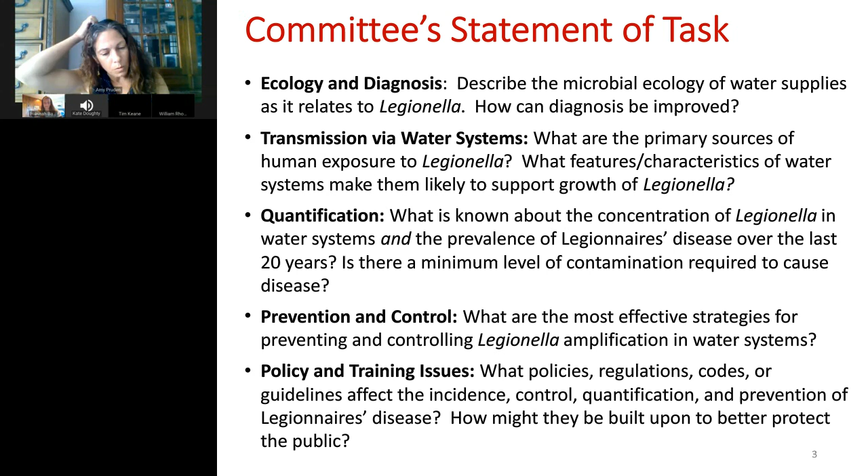Note that this was a consensus report derived from a committee of experts on various aspects of Legionella. Over a 2-year period, we had several face-to-face meetings, including public forums and expert presentations, to work out the details of the report, gain input, feedback, and ultimately consensus. Here is an overview of our statement of task and what is covered in the report. And the report basically follows this outline: ecology and diagnosis, transmission via water systems, quantification, prevention and control, and policy and training issues. So I'm going to go through and highlight each of these sections and mainly focus on the recommendations that emerged from the report.

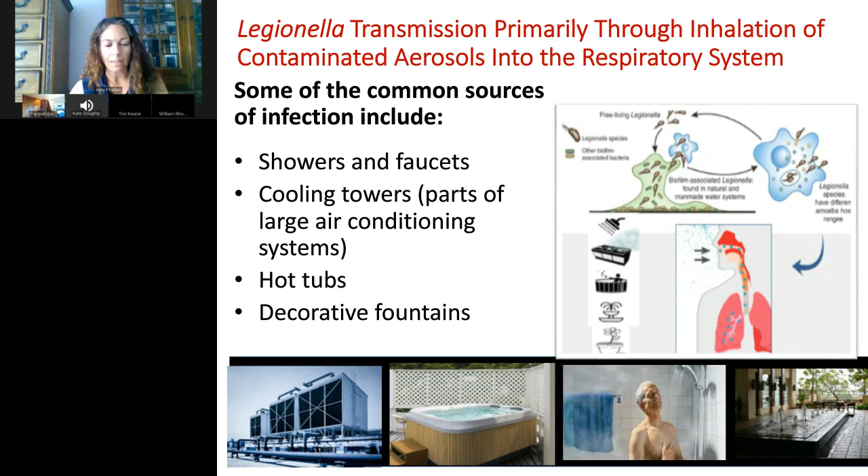So firstly, just so we know what Legionnaires' disease is, it is a severe form of pneumonia with a high death rate. It's caused by inhaling tiny droplets of water called aerosols that contain the bacteria belonging to the genus Legionella. Where do these aerosols come from? Well, obviously, since I'm here today, engineered water systems, and that includes showers and faucets, also cooling towers, hot tubs, and decorative fountains.

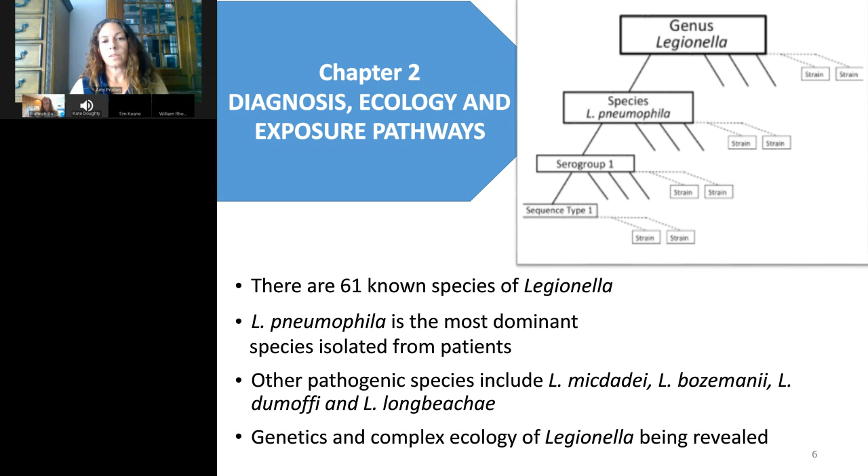So chapter 2 focuses on the microbial ecology of Legionella with the aim of understanding why it is prone to growth in water systems. And this sets a backdrop with respect to what we might do about it. Notably, there are many different kinds of Legionella, 61 species to be exact, but Legionella pneumophila is the one that is most frequently isolated from patients. From there, you'll hear about different serogroups and sequence types, and this helps to track the source of an outbreak by providing a fingerprint of sorts.

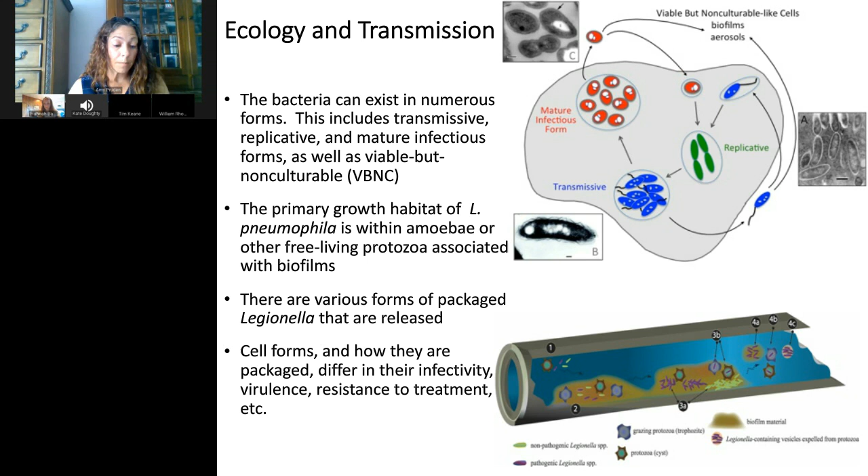But unfortunately for us, Legionella can feel quite at home in the plumbing environment. And in particular, they like to grow in biofilms, and they replicate there within free-living amoebae that slither along and graze on these biofilms. After replication, they're released from the amoebae in an infective and virulent, that's disease-causing, form, and ready to be inhaled when the water is sprayed and aerosolized.

In terms of recommendations, I would generally boil these down into an interest in better understanding the exact conditions that make Legionella of all species and serogroups and serotypes grow in plumbing, and to be released in a form that causes disease.

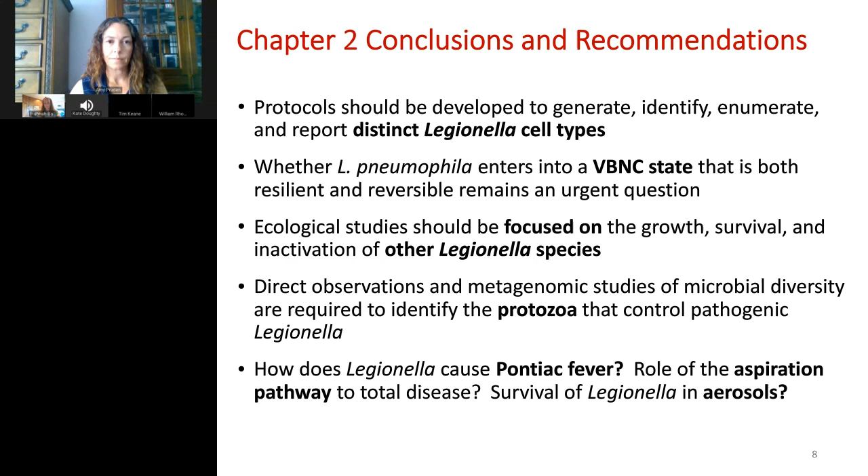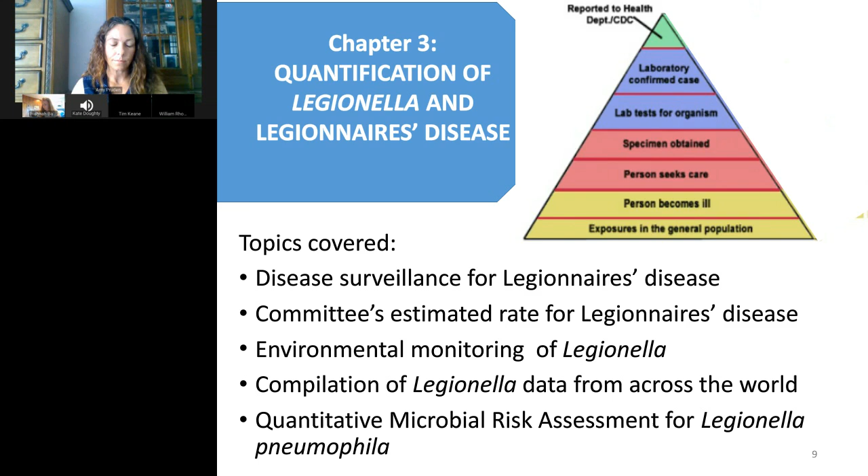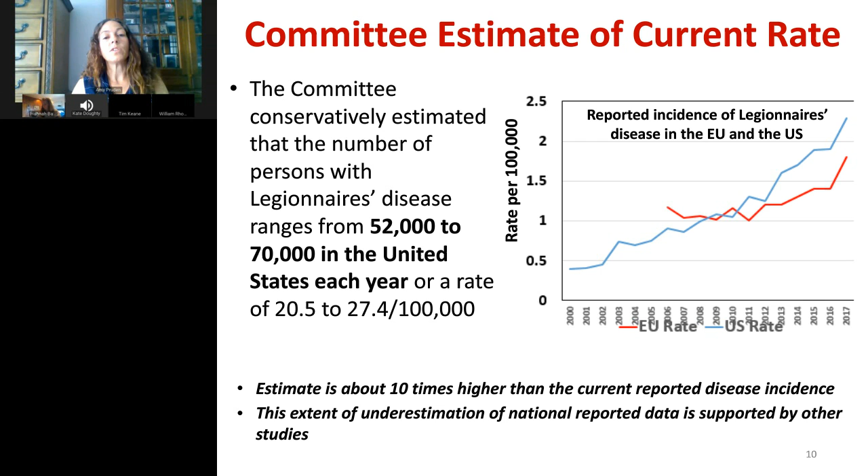A major contribution of the report, in my mind, is an independent analysis of available data, suggesting that even though we know rates of Legionnaires' disease infections are increasing around the world, the numbers are probably about 10 times worse than we thought. Often you hear the number 8 to 18,000 cases per year, but when you factor in the widespread underreporting that's going on, then the likely number is 52 to 70,000 cases per year in the US.

Another major contribution of the report is a step towards a non-zero action level for Legionella colony-forming units. The rationale is that you're going to get Legionella hits here and there when you test pretty much any water source, and that doesn't necessarily mean that there's a risk of outbreak. And I probably don't need to tell you all that a great deal of money can be wasted trying to achieve an unrealistic goal of zero Legionella.

So here we examined reported levels of Legionella in absence of outbreak and when there is a known outbreak to identify a conservative threshold of 50,000 CFU per liter as an action level to warrant remediation. But we recognize that a lower level might be warranted when you have at-risk individuals, but this is a starting place.

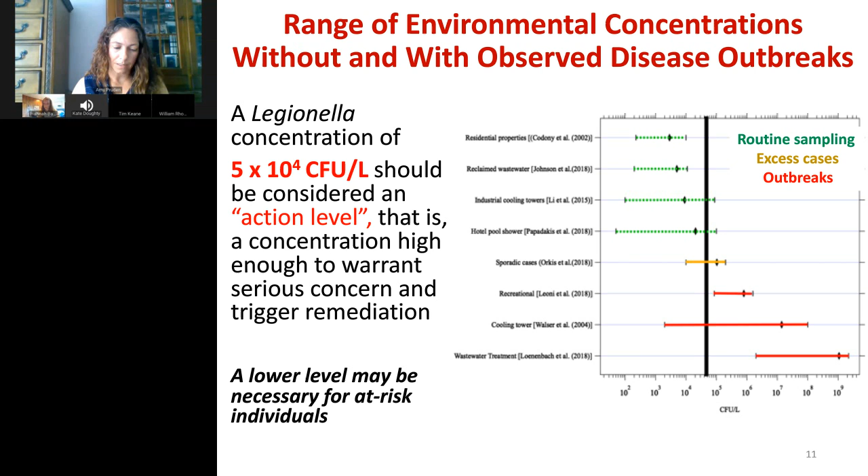These are the specific recommendations from Chapter 3. First is better clinical tools that capture more cases of Legionnaires', not just those caused by serogroup 1, which is what the urine antigen test captures. The second is to get a better handle on sporadic or non-outbreak disease. That was a big highlight motivating the report: we talk about outbreaks, but 95% of Legionella cases are not outbreak associated. And it was suggested that regional centers of excellence could help to support and build up the capacity of state health departments to detect and investigate cases of disease.

We also called out the need for more sensitive and reliable methods for monitoring, and finally, for the incorporation of quantitative microbial risk assessment to inform monitoring and regulations and get more confidence in the estimate for action level.

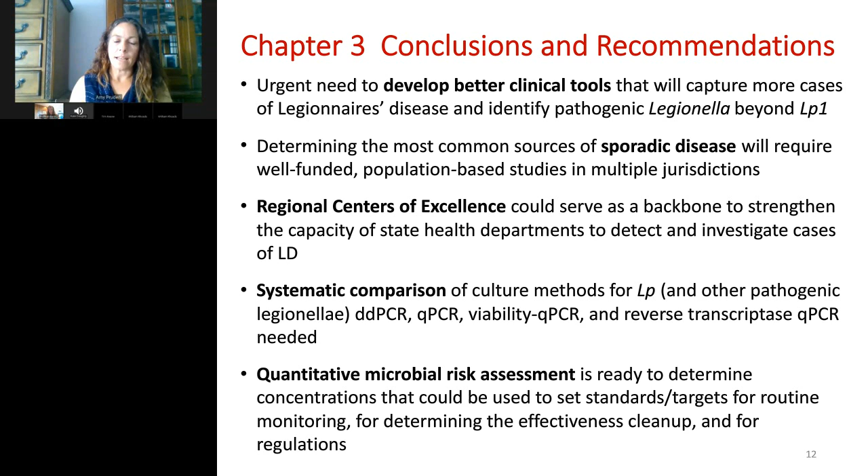Chapter 4 then delves into strategies for the control of Legionella in buildings. The main ones you will find are illustrated in this figure, ranging from elevated temperatures to addition of disinfectant, hydraulic design, and plumbing materials. An important point here is that none of these control strategies act in isolation, that you really need an integrated perspective adapted to the system of interest. For example, hydraulic design is not simply washing the Legionella out of the system, but it's ensuring that disinfectants and hot water are being effectively delivered to kill the Legionella.

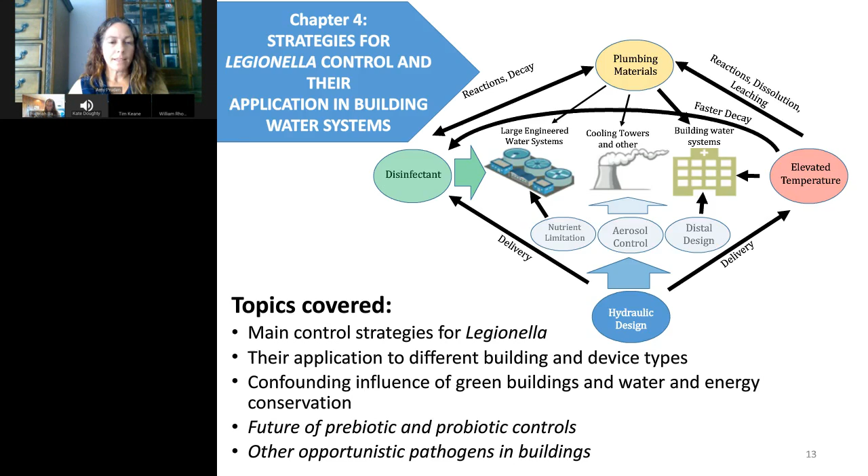And in fact, from the literature review, I'm sure this audience would be interested to know that we found that maintaining elevated temperature throughout the hot water plumbing was the overarching factor in keeping Legionella numbers low and reducing risk of outbreak. And thus our recommendations were that hot water temperatures should be maintained above 60 degrees Celsius and at least 55 degrees Celsius to the distal points.

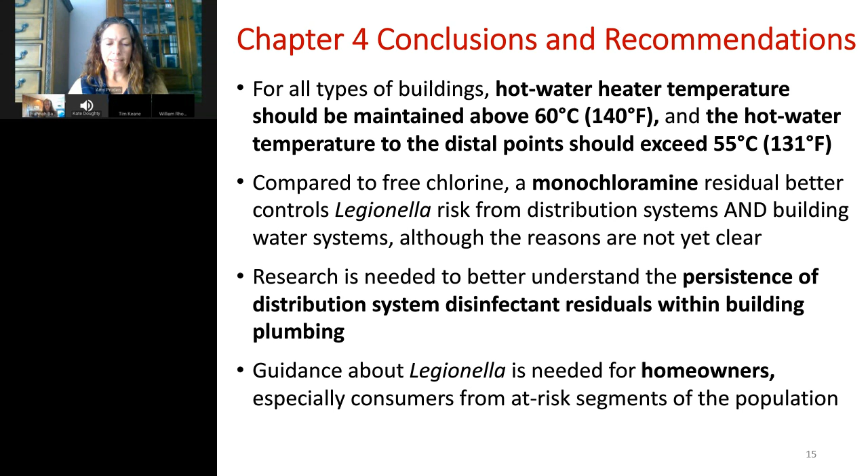We also noted that monochloramine tends to be more effective than free chlorine for Legionella control, but we understand this can be situation specific. We also talked about how much of the guidelines are focused on large institutional buildings, but if most Legionella cases, 95%, are indeed sporadic, then it would be good to have guidance for homeowners as well.

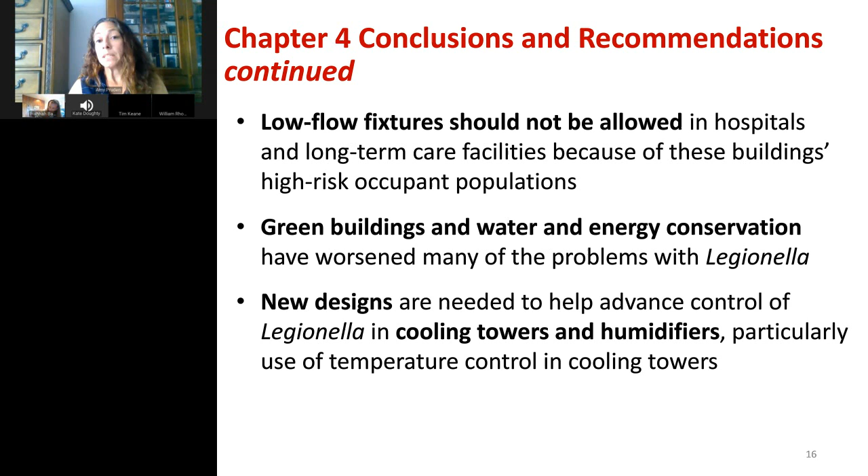Finally, we came out strong against low flow fixtures and green water features in high-risk environments, and also recommended new designs for cooling towers to avoid growth of Legionella and opportunity for people to be exposed to contaminated aerosols.

And finally, I personally found Chapter 5 to be one of the more interesting chapters. It provides a legal framework in the US, what is our legal framework, and also looks at how other countries are addressing the problem. Number one, the Safe Drinking Water Act, unfortunately, does not provide protection from Legionella. All of the focus tends to be at the building management and liability level in the US.

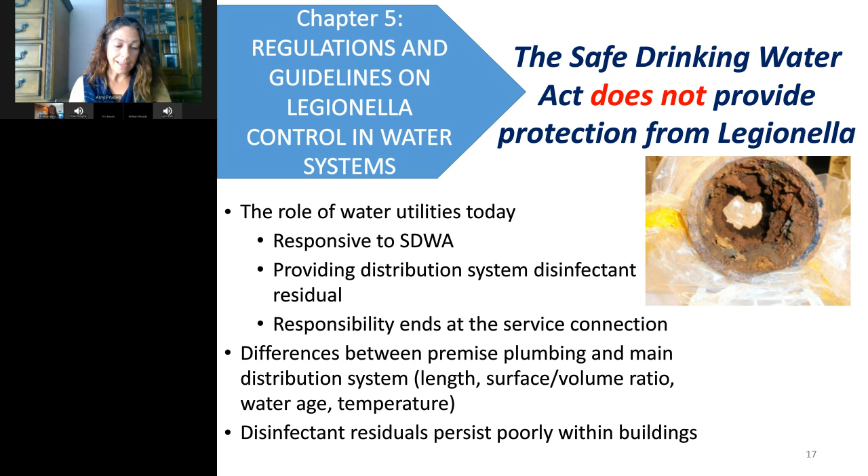Yet, following Flint, Michigan, we are seeing examples wherein municipal water supply is a key factor in triggering Legionnaires' disease outbreak. Yes, building plumbing is more vulnerable than water mains to Legionella growth due to factors like the high pipe surface area, depleted disinfectants, and warm temperatures, but changes in the municipal water supply can trigger growth in building plumbing as well.

And here is a summary of how Legionella is managed in the US. There are 4 examples of regulations covering Legionella. Both healthcare and cooling towers in New York State, which became highly vigilant about Legionella following the 2015 Bronx outbreak. The third is all Veterans Administration hospitals. And the fourth, most recently, actually as of 2017, all hospitals receiving Medicare, Medicaid funding must have a water management plan.

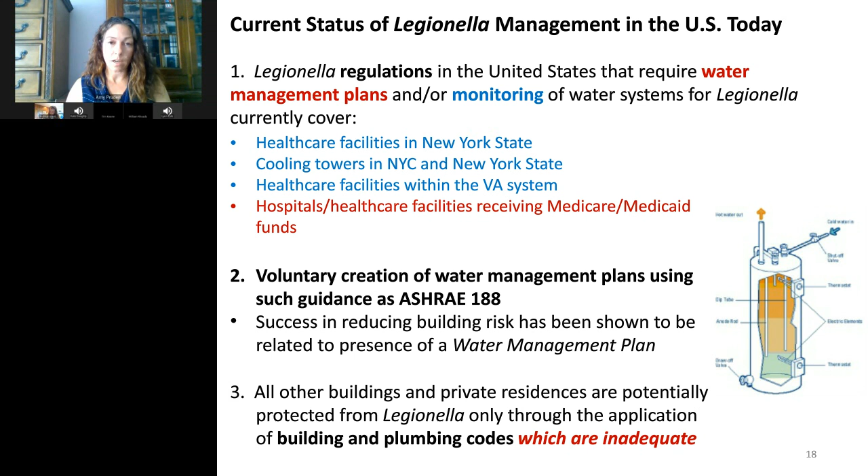Otherwise, Legionella control has been largely voluntary for public buildings, many of which choose to follow ASHRAE 188. And for private residences, we really only have the building and plumbing codes, which are pretty much silent on Legionella.

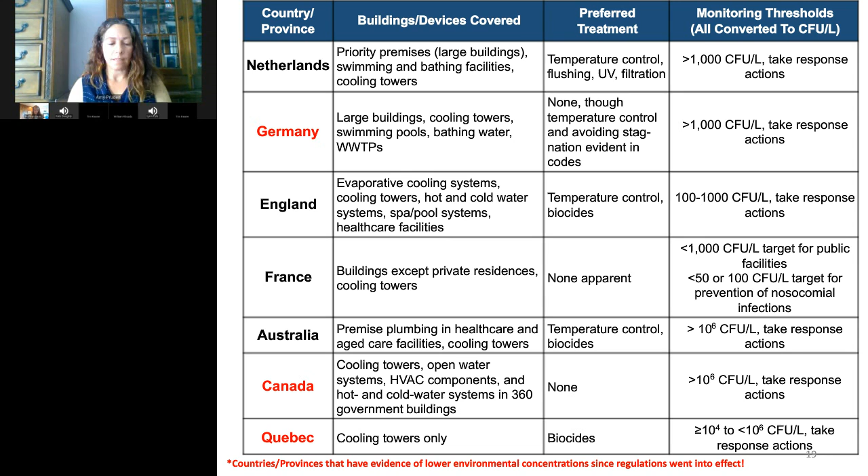Our recommendations, we would like to see required monitoring of Legionella in all hospitals, registering and monitoring of cooling towers, required water management plans in all public buildings, requiring elevated water temperatures, and minimum disinfectant residuals throughout the public water systems.

So that was pretty much a whirlwind tour of the report, and I hope that I've helped capture your interest that Legionella is indeed a very important public health problem, and that you all here at the Hot Water Forum actually stand in a key position to do something about it.

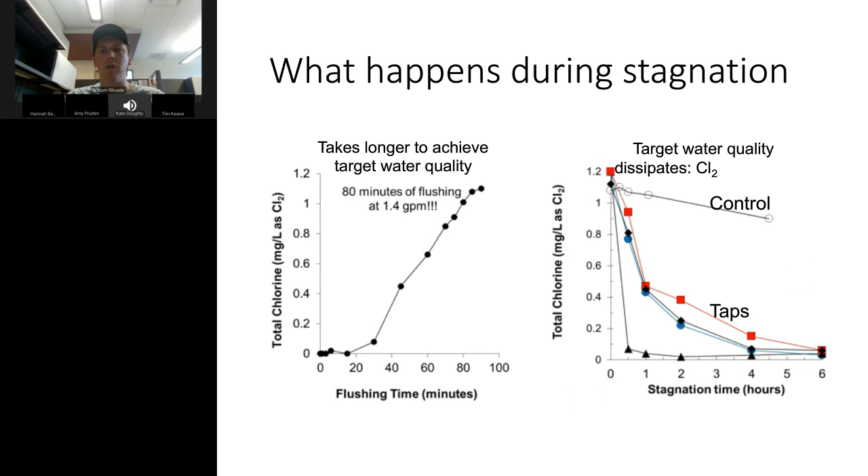The similar dissipation of target water quality also occurs with temperature. So, of course, temperatures will last a little bit longer if your pipes are insulated and things like that. But even if you're flushing your outlets at 60 degrees Celsius, the water temperature at that point of use will dissipate, and for the vast majority of time most outlets are sitting stagnant, unused, and the water can remain at growth temperatures for Legionella and other microorganisms and opportunistic pathogens as well.

The other thing that happens during stagnation is that biofilm and scales can become destabilized, so that when you flush the water, you can release a large amount of either iron or copper or lead if you have those sources in your building plumbing system. Usually what happens is that the first bit of water has higher concentrations than really well flushed water because those scales are being destabilized.

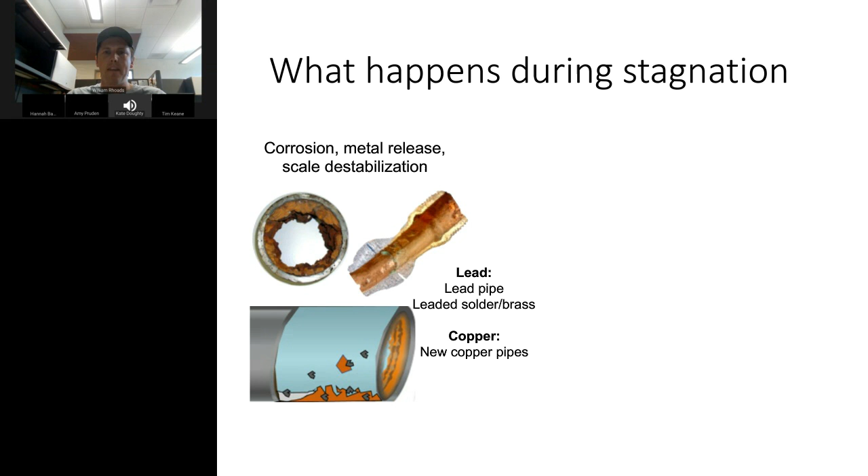And of course, during stagnation, opportunistic pathogens can also grow and be released from biofilm. And during stagnation, biofilms actually become less stable, so the first bit of water that comes out of your tap is the most likely to have the highest level of microorganisms. And Legionella has a specific relationship with host organisms that are amoeba, and they can grow within amoeba to very high concentrations, and they can be protected from chlorine and temperature within the amoeba as well.

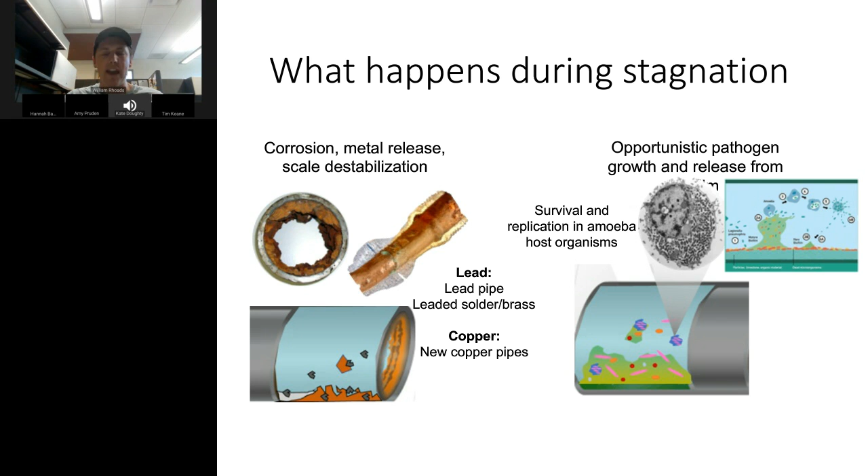So it's easy to imagine that if these amoeba hosts are preventing the exposure of Legionella to the target water quality, like a disinfectant residual or high temperatures, how they could survive within the pipes, even if you're occasionally achieving target water quality. So it's really then about having your water hot enough for long enough and achieving that frequently enough that Legionella growth is not permitted.

And so hot enough is very clearly defined, as Amy outlined. If we generate hot water above 140 degrees Fahrenheit, then Legionella can't grow in the tank. And if we distribute it and recirculate it above 120 degrees Fahrenheit, then it's not going to grow in the main distribution system either. But at the individual taps, when you flush your water and you achieve your hot water temperature at the point of use, it'll be there, but again, it'll dissipate over time. So it's about determining how frequently you have to do this.

And in most cases, or some cases, regular use at the distal outlets will be enough to achieve this. But in some rarely used or infrequently used outlets, it might require people to go in and manually flush the water. But I did want to point out that sometimes you can have unintended consequences from this type of control strategy. And so I wanted to talk about one experiment that I did during my PhD dissertation,

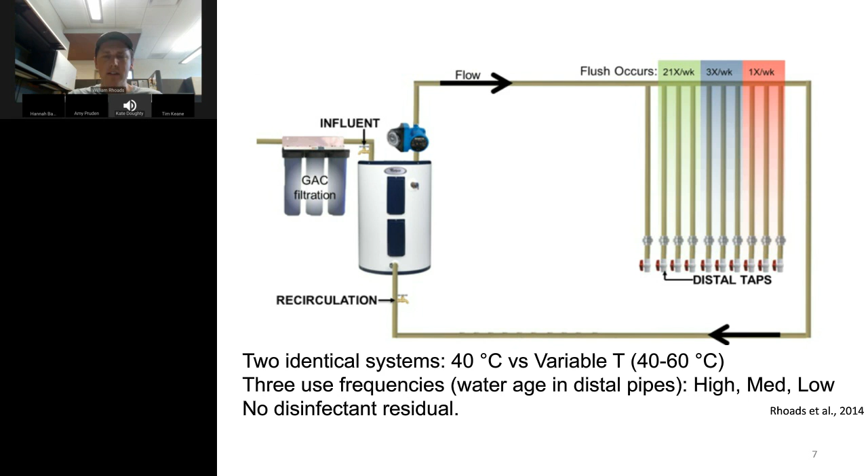where I operated pilot scale hot water systems that had a regular residential water heater with this recirculating loop. And I had two identical systems. One system was 40 degrees Celsius, and the other system started at 40 and was gradually increased to 60 degrees Celsius. And off of the recirculating loop, which was continuously recirculating 24/7, I had simulated distal outlets that were flushed 21, 3, or 1 time per week to simulate high, medium, or low use frequency. And all of this was conducted without a disinfectant residual present to test worst case scenario water coming into the water heater.

And so what we're going to look at is what I call a regrowth factor, and it's on a log scale. So a value of 1 on this graph indicates that there was 10 times more Legionella pneumophila in the distal outlet than in the recirculating line. And a value of 0 indicates that there was no change or no regrowth in the distal outlet compared to the recirculating line.

And I really wanted to highlight just kind of the most critical result here, where when we were operating our water heater at 123 degrees Fahrenheit in the recirculating line, the distal outlets that were flushed just once per week seem to have thermal selection for Legionella growth at those individual distal outlets, as opposed to the medium use and high use taps, which were likely used frequently enough to inhibit the regrowth of Legionella.

But essentially what we think was happening was the 123-degree water was coming into the outlet once per week. It was disinfecting a lot of the microorganisms that were at that distal outlet, but the Legionella were potentially surviving within amoeba hosts. And then after the thermal shock had dissipated during the stagnant conditions, the amoeba and Legionella could then regrow.

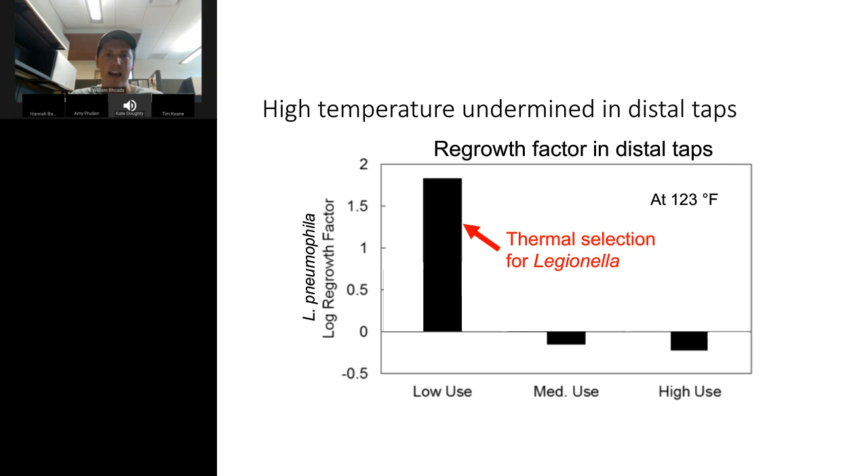So in terms of when you should flush and a little bit of how you should flush, for flushing of water heaters, remedial flushing is really necessary after prolonged stagnation when the water heater tank has been very, very stagnant. And through this practice, you're temporarily decreasing the contaminants, but it's not a long-term solution. And it should be noted that incomplete flushing may actually temporarily increase the level of contaminants as well.

So for instance, if you're using manufacturer recommendations, if you completely drain and clean and refill the tank, if you do this inefficiently, then you're basically going to be disturbing and resuspending some of the debris and sediment that accumulates at the bottom of tanks.

For remediation of Legionella, it's better to just focus on turning over the entire volume of the system by flushing at a drain valve, for instance, at the highest flow rate that you can to turn over the entire volume of the system. And if you're flushing at this drain valve, you can turn off the heater and just flush until the water becomes totally cold, or you can estimate the time needed to flush based on the volume and the flow rate that you're flushing at.

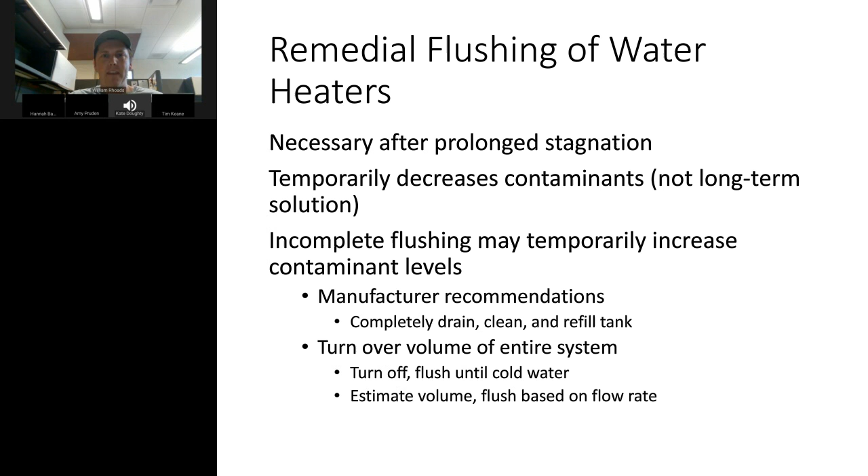In some instances, regular or routine flushing of water heaters may also be necessary if you're not operating the water heater at the recommended temperature settings. If you're operating them too low, then you'd want to flush your water heater regularly enough to try to introduce a disinfectant residual to the water heater as well. So this can be done in many cases through regular use. If you have an appropriately designed system, regular water demand will turn over your water heater and achieve this for you. But it could also be necessary that you actually go through and simulate regular water use.

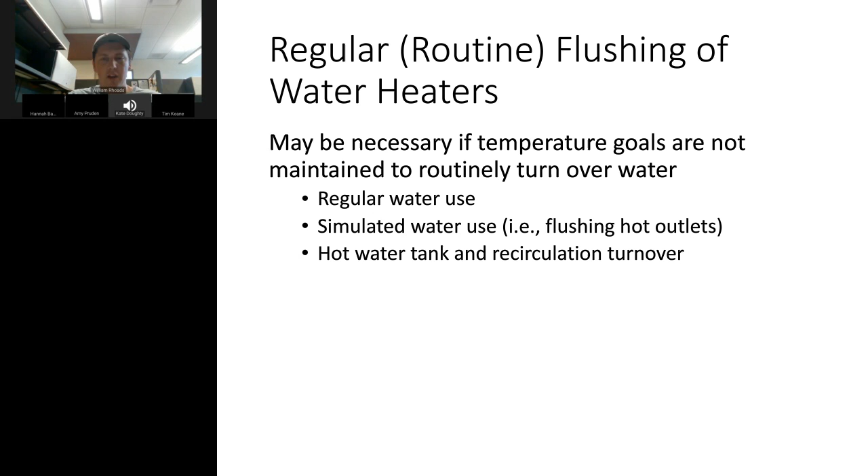For instance, in the current environment where the stay-at-home orders have decreased building occupancy, it may be necessary to go in and manually flush the water heaters. And when you're doing this, you should focus on flushing both the water heater tank and the recirculating line if it's present, because the recirculating lines are the higher risk for growth of the bacteria. And this can be done manually just by opening outlets or automatically using solenoid valves and timers to routinely do this on a daily or weekly basis. And how frequently you do that can be based on measurements of water quality and temperature in the system that you can document.

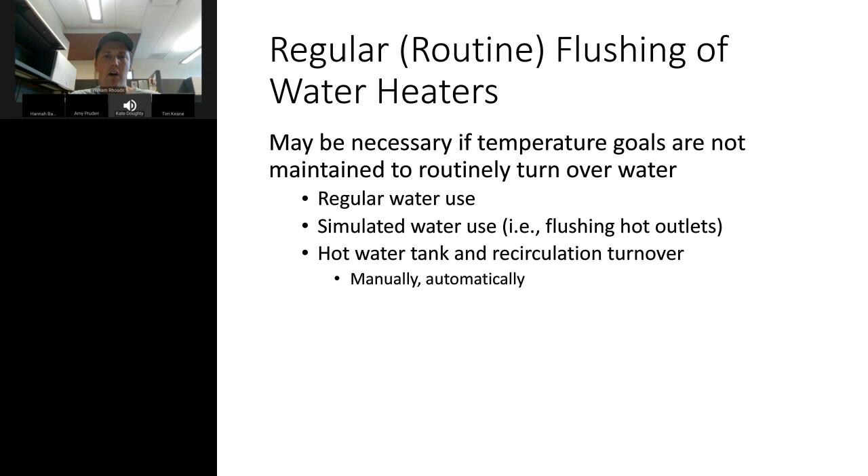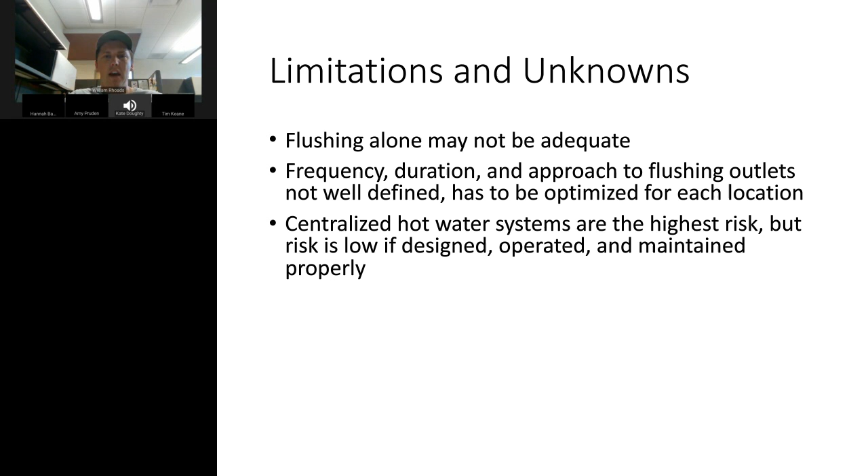And the last thing that I just want to say is that if you're going to go out and perform flushing activities, you should be validating that the flushing practice is achieving the goals that you're trying to achieve, meaning that when you're flushing, you want to document that the temperatures that you're targeting are reached during flushing activities. And then afterwards, you want to validate that your flushing protocol was successful through things like microbial testing, actually testing for Legionella, the bacteria.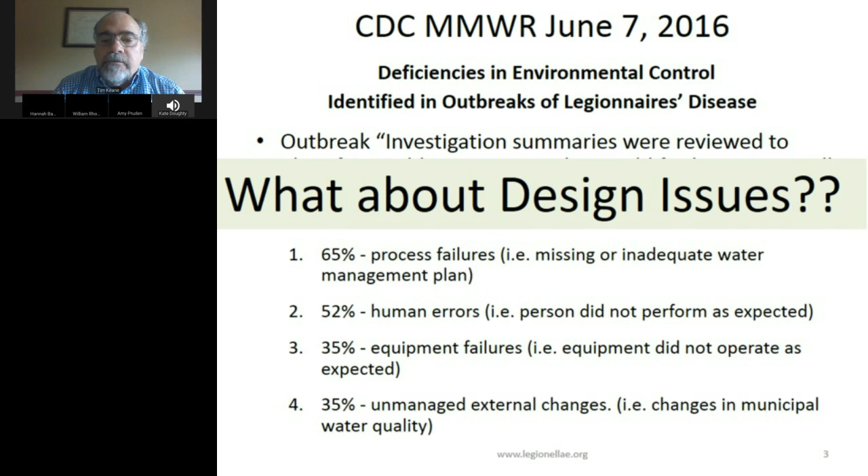So many think energy savings and Legionella are competing issues, that actions to improve one will worsen the other. This is true if you take a building designed for 3 GPM at the fixtures and basically install a sock at those fixtures, an orifice, to reduce the flow down to 0.5 GPM. You then turn those drop legs into dead legs. Talk about getting the cart before the horse: dramatically reducing flows at the fixtures without changing codes and water demand calculations allows for dramatically smaller distribution pipes that will greatly increase potential for Legionnaires' disease.

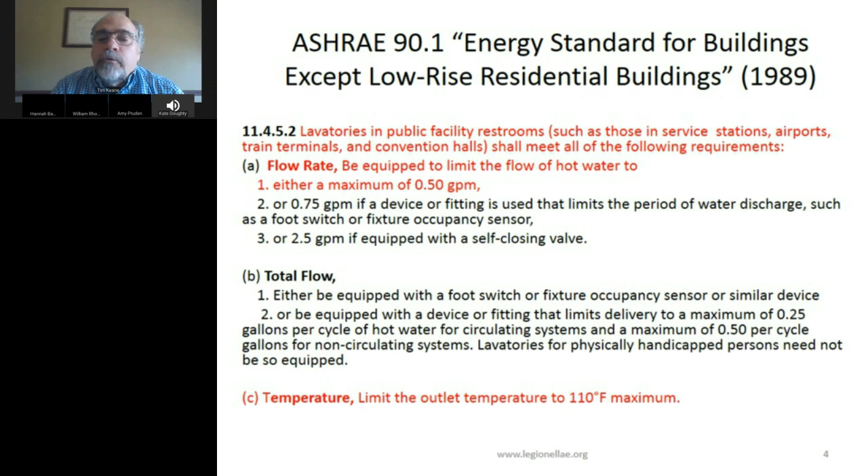ASHRAE 90.1, published in 1989, was the first document to recommend 0.5 GPM and 110 degrees Fahrenheit in public restrooms. This was an energy-saving standard, but it also greatly increased the risk for Legionella growth in plumbing systems. Here's an example from a case study of a project I recently worked on. The original spec softeners were 140 GPM. This was what was installed in the hospital for service capacity, and the peak capacity was 190 GPM.

We found that these softeners completely consumed all of the chloramine in the incoming water supply, and chloramine is extremely stable, extremely difficult to destroy. These softeners did it. Essentially, these softeners acted more as a bioreactor than a water softener. They were so grossly oversized, the velocity so low, the retention time so long, that it destroyed all the incoming city water disinfectant and grew a ton of bacteria in the meantime.

We did a study and found out that the demand on this plumbing system was 15 GPM during normal load and 35 GPM peak demand for hot water makeup. These softeners were hot water makeup only. So we replaced the existing softeners with newer softeners that were 55 GPM service capacity, 78 GPM peak capacity, and a 1.5-inch inlet and outlet valve.

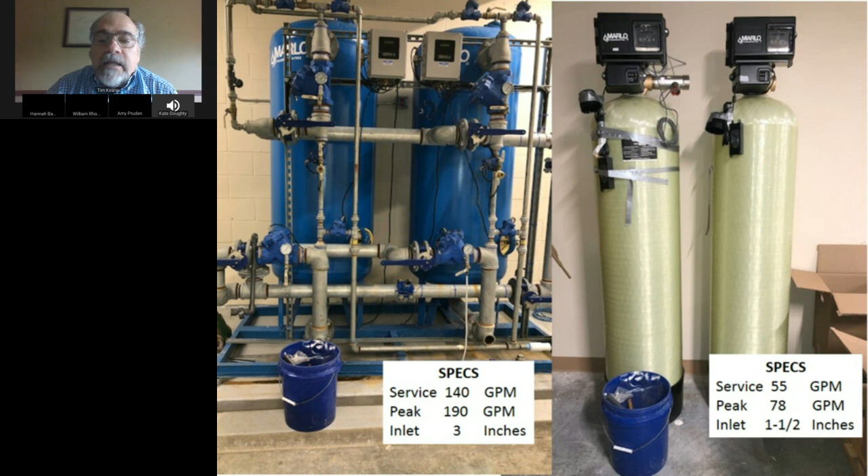So what does this mean from an oversized softener? Well, the oversized softener gave us longer retention time in the softener, more water aging. It destroyed all the cold water disinfectant. It yielded high bacteria growth in the control valves and the tens of thousands of resin beads in the softeners. And because the oversized softener was so big and we had to regenerate it every other day to keep bacteria levels down, we were using 15 times more salt than was needed.

And because the water during regeneration to drain was much higher, we were wasting large volumes of water in the regeneration process. Data confirms everything else in the plumbing system was equally oversized: the hot water return piping, the hot water return pumps, the cold water supply piping, the hot water supply, cold water supply headers and risers, and the heaters. The facility came with 4 heaters designed to operate in unison. In the end, only 1 heater was needed, and it was only at partial load. That gives you an idea of how oversized everything was.

So what's the impact of this? Well, the original softener is shown in pink with an average velocity of 0.68 feet per second. It was essentially a stagnant water dead leg at all times. The softener we replaced it with, at 15 GPM, had an average velocity of 2.72 feet per second, exactly where we want it to be.

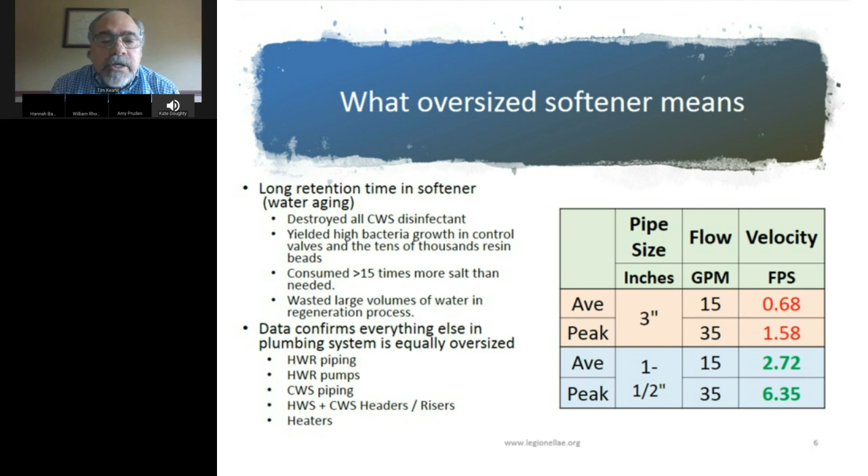And the peak velocity was 6.35 feet per second at 35 GPM. So think about it. This is the norm because codes are way outdated, that plumbing and associated equipment is grossly oversized, making that equipment and that plumbing the potential to be a dead leg.

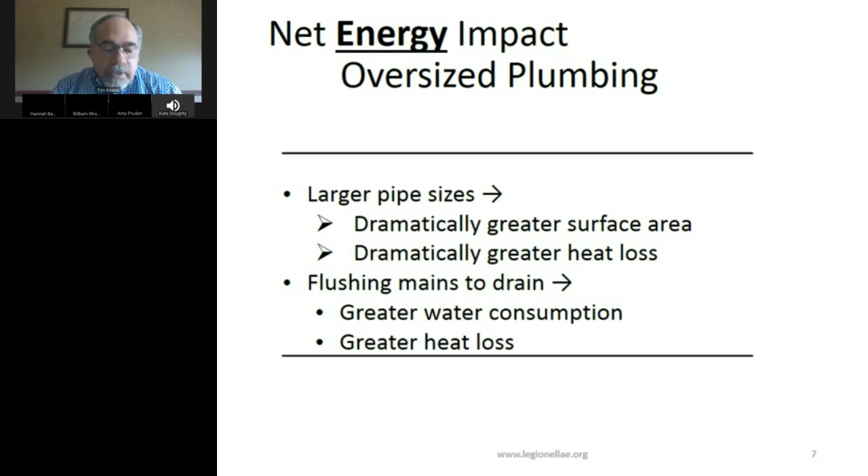What's the net energy impact of this oversized plumbing? Larger pipes, greater surface area, dramatically greater heat loss. Flushing mains to drain to control the bacteria, greater water consumption, and greater heat loss. And what's the net Legionella impact of this oversized plumbing? Basically, turning the whole system into a dead leg under normal operation, extremely high risk for bacteria growth.

So what can be done about it? In hotels, apartments, hospitals, showers and rooms require a central hot water system. What about office buildings, educational facilities, conference centers? Do we need large central hot water circulating systems there? On-demand water heaters and zoned hot water systems in lieu of large central hot water systems will dramatically reduce energy and dramatically reduce Legionella risk.

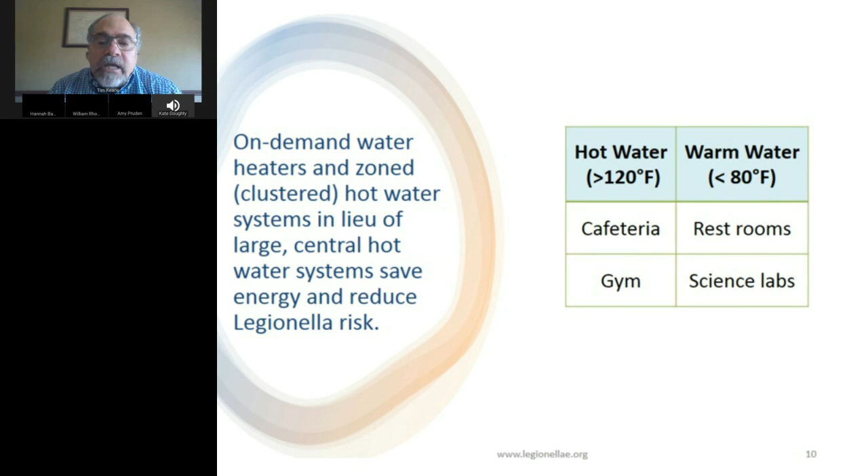We don't need 120 degrees to wash our hands in a restroom. 80 degrees is more than enough. Same way for science labs in schools. Gyms, cafeterias need greater than 120 degrees for showers and washing. With on-demand zone heaters, we can get that done.

This document is IAPMO UPC code Appendix N. I think it's the single greatest plumbing code change directed at reducing Legionella risk. It has correct Legionella growth and scalding risk ranges. It addresses issues created several decades ago when a huge safety factor was added for temperature and scald risk.

130 was recommended for water heaters, but 120 was substituted because it was thought if 130 was good enough for scald risk, 120 would be safer and there would be no downside. At the time, we didn't know that 120 is a huge downside because of the great increase in Legionella risk that we've learned since then.

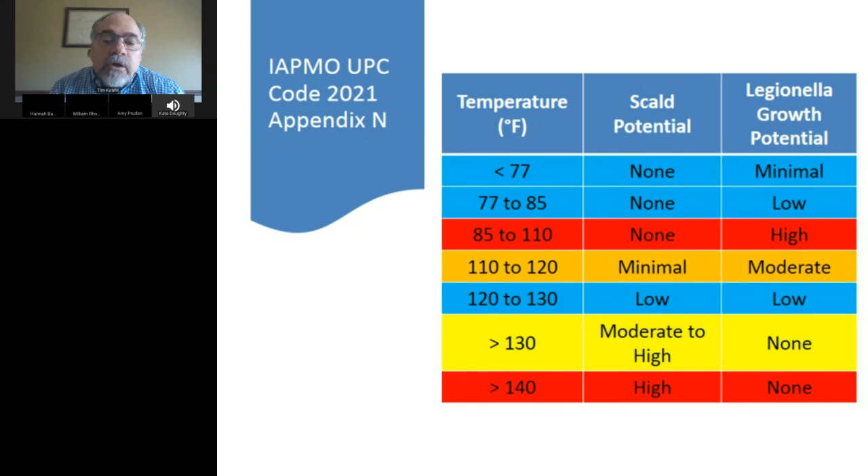So in this chart is highlighted the places you don't want to be: 85 to 110, the absolute worst place for Legionella growth; 110 to 120, moderate Legionella growth; 120 to 130, as William mentioned, extremely low scald risk and extremely low Legionella growth. So what's the net impact of on-demand heaters and zoned hot water?

Eliminate hot water distribution systems, zero circulation losses, no balancing issues. If circulation is needed, you will have smaller lines, smaller hot water return pumps, and the hot water return pump can be operated only when needed. Guidance for Legionella control is to operate central hot water return pumps 24/7. But if you have a conference center that has a conference scheduled from 1 to 3 p.m., you can turn on the hot water return pump at 12 and give good control of hot water with the least amount of

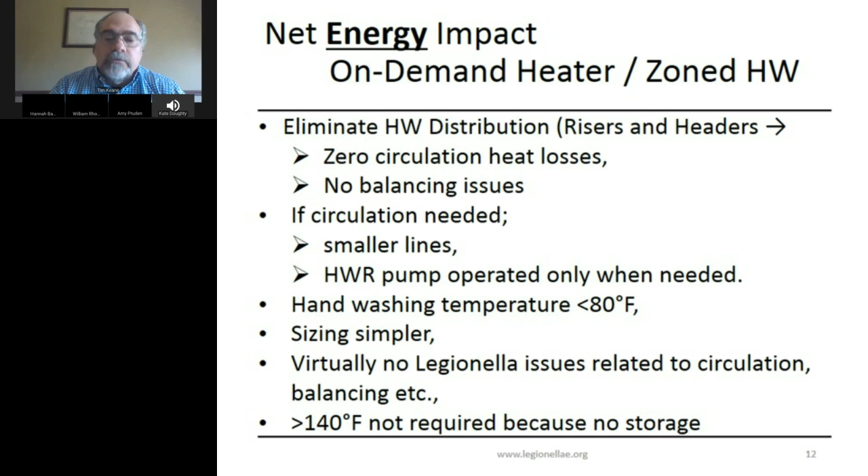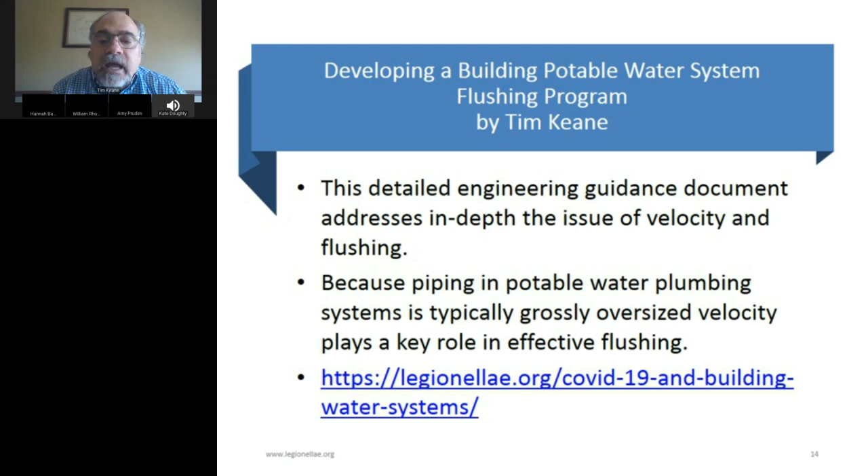So listening to what William said earlier about flushing a water system, add this on top of it: flushing a system that began with being grossly oversized makes it that much more important that flushing of all these components be done extremely well if the system's been stagnant. I wrote a document, Developing a Building Potable Water System Flushing Program. It goes through in detail engineering guidance on flushing and velocity, and you can find that document on my website.

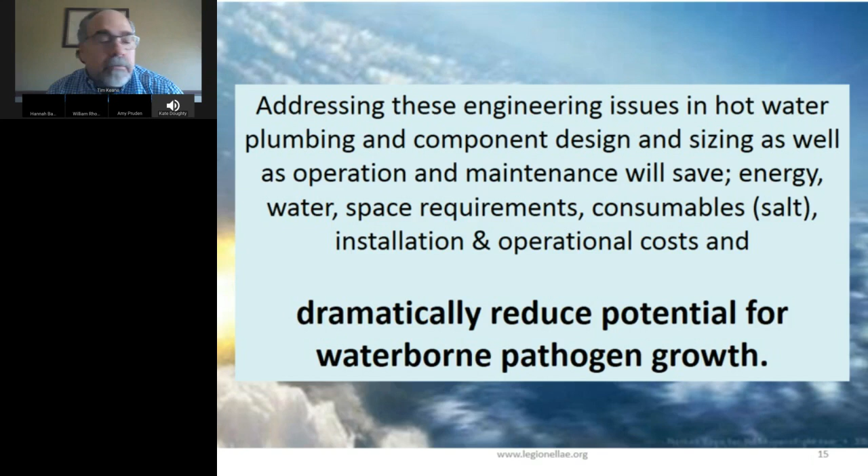Addressing these issues in hot water system plumbing and components design and sizing, as well as operation and maintenance, will save energy, water, space requirements, consumables like salt, installation and operational costs will go down, and dramatically reduce the potential for waterborne pathogen growth. That's it, Hannah.